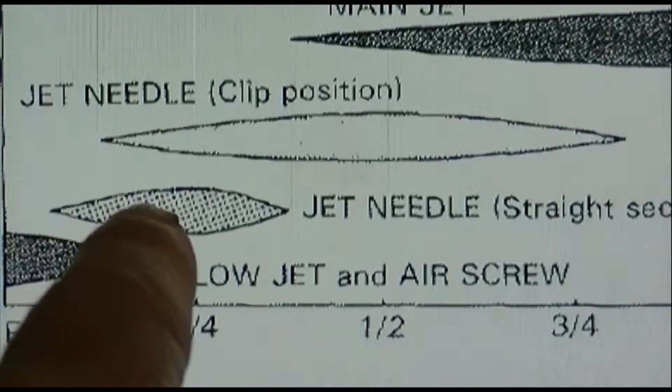So here we have these 3 different systems, all capable of causing poor throttle response and rough running at small throttle openings. I'm trying to chase down this roughness at 3,000 to 4,000 RPM, and when I'm driving it, there's rideability and tractability issues when I'm lazing along at low RPMs between 3,000 and 4,000, and I crack the throttle open a little bit, which is what you're doing in the twisties and in the parking lot whenever you need throttle finesse and very accurate speed control. That's where it's screwing up.

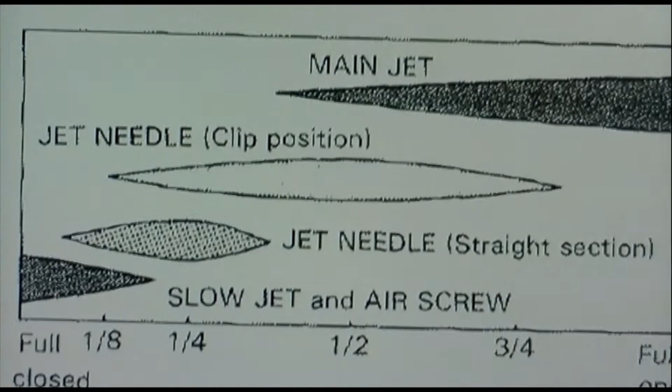So now I've got to chase down the cause of the problem. Although this is a diagram for a slide type carburetor, the constant velocity carburetor will work the same.

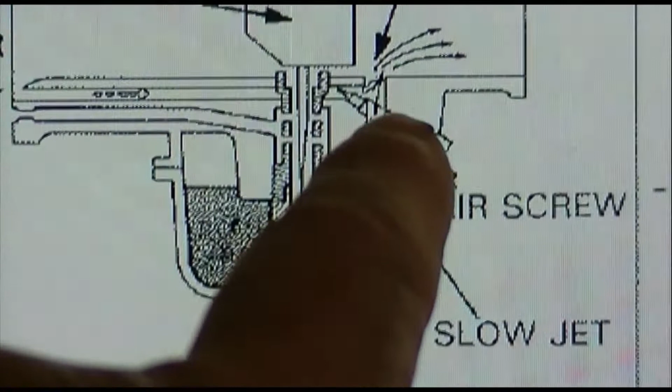So you see over here, here's a slow jet. This is a fixed jet, and there's 2 air passages in here, one that goes over to the needle jet and one that goes over to the main jet, and there's the air screw, and it gets some air through that passage too.

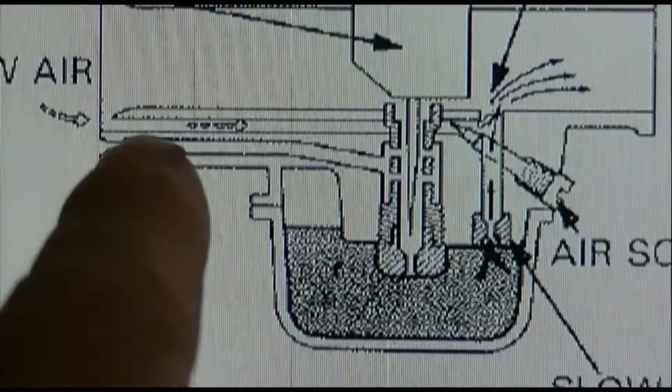So if there is a foreign object or algae or something clogging these air passages right at the mouth of the carburetor, that can screw up the fuel metering through the low speed jet, the slow jet, and also through the needle jet, which is the slow speed part of the needle on the slide.

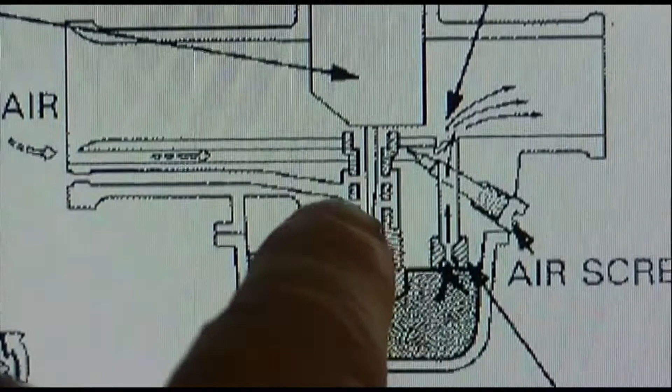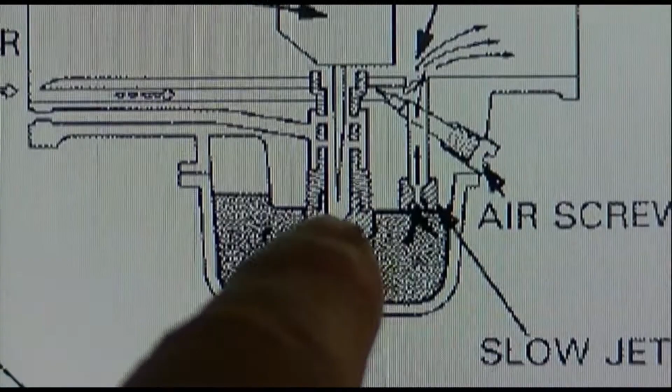And this air screw is also the pilot screw on our carburetors, and if that's clogged up, that can also cause problems. The thing is running okay at full throttle, high throttle, so I'm not concerned about clogs in the main jet. But these are issues to deal with.

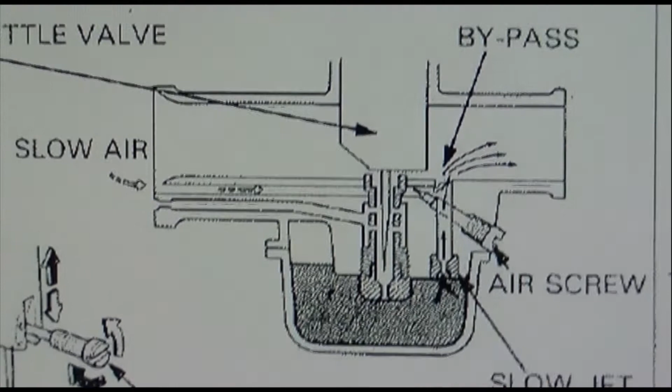And one of the things that I want to do is try to do everything I can to try to clean these passages before I remove the carburetor. By removing the air box, I can get at these little passages.

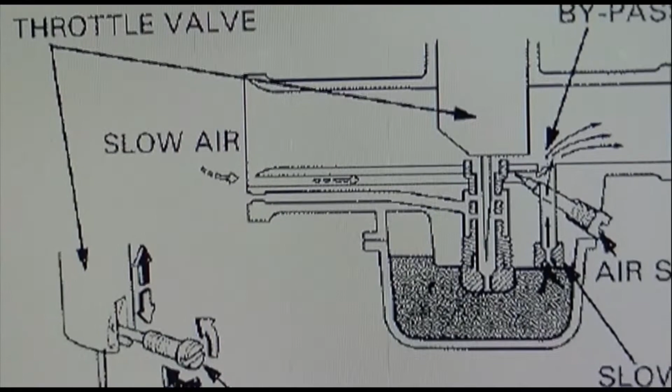They're right at the mouth of the carburetor, and while the engine's running, I can squirt carburetor cleaner through there. And if there's algae or crud in there, it may help blow it out, clean it out, and save me removing the carburetors.

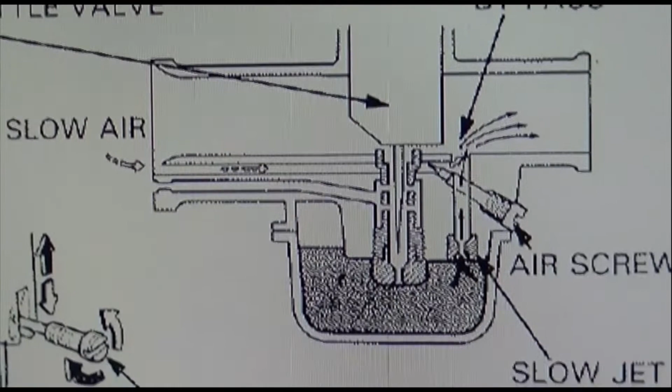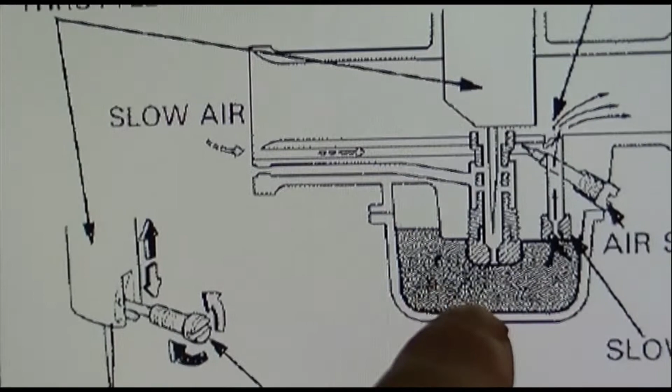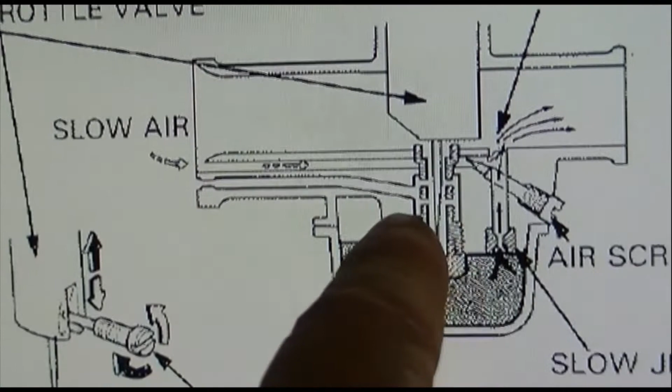The other thing I can do is put some carburetor cleaner in the float bowl, get a good mix of that in mixed with the fuel, and run that through there with the engine running, and it'll run like crap for a minute or two. But if there's crud in the needle jet or the main jet, it'll help clean it out, unless it's actually a particle, and then you've got to actually take the thing apart, which we're trying to avoid.

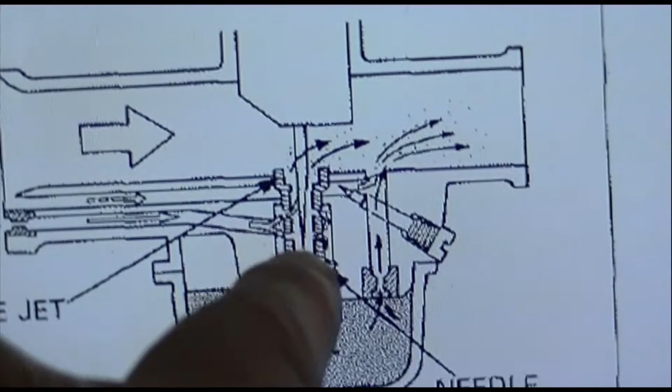Alright, this is the same diagram with a medium throttle opening. So as you can see here now, the needle is raised partially, and it's uncovering this air jet and allowing more air to flow through there and to siphon up more fuel.

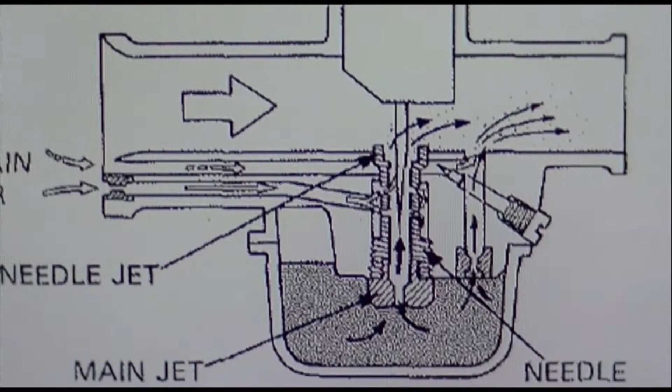So somewhere in the range between a small throttle opening and a medium throttle opening, we're having fuel flow difficulties, and so we're going to try to clean these passages out without disassembling the carburetor, and if that fails, then we'll have to take it apart.

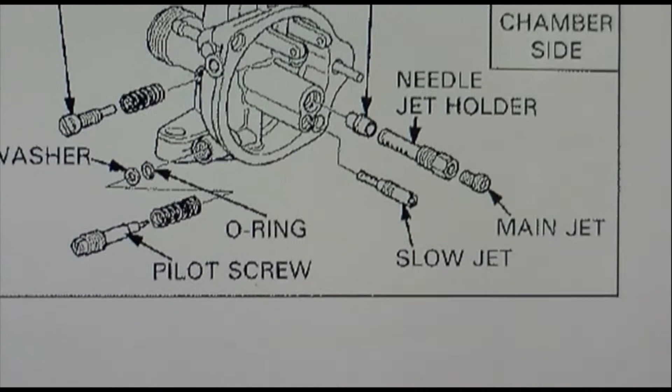Well, there they are, all the likely culprits. The slow jet, the needle jet, the main jet, the needle jet holder we used to call the emulsion tube, and the pilot screw, or air screw, whichever you choose to call it, same difference.

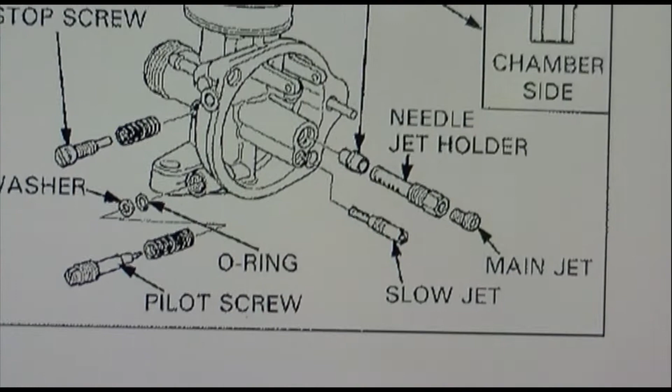And the most likely problem is something clogging a pilot jet screw air passage, something clogging the slow jet, or something clogging the needle jet. So all of those you can get at with the float bowl cover off.